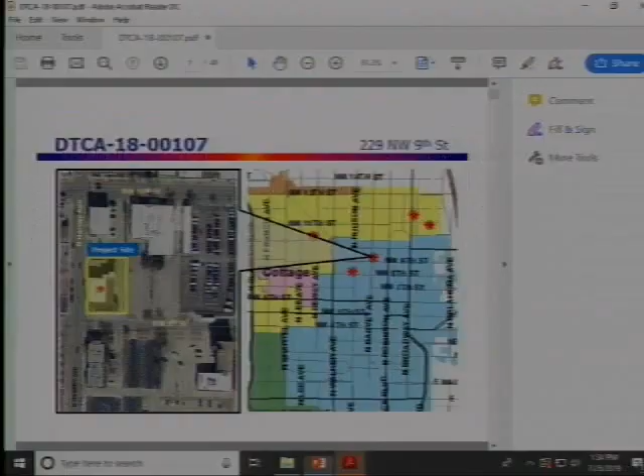Is the applicant present? Yes. And Laura, do you want to tee this up?

For those of you who are new, and we have all of those here today, and we appreciate you're here, this item came before the committee back in 2017 for work that had been done without approval. There were concerns at that time about the work that was done, and that application was ultimately denied by the committee. Unfortunately, because of how much work had been done, it just sat there, and then the work continued, and it's almost finished.

So we have a new application for consideration today. In the staff report, we did discuss the fact that given the amount of work that's been done, it would be extremely difficult to return the building to what it used to look like. You could, but it'd be very difficult.

In staff's recommendation, we looked at some modifications that can be done so that we can actually go forward with an approval and get this closed out, because it's essentially been a code enforcement case for several years now.

So there are 2 buildings. One is the tan brick and one is the red brick, and they're connected, and they were built at different times. The red brick building did not have a street presence previously, and that is what they have added.

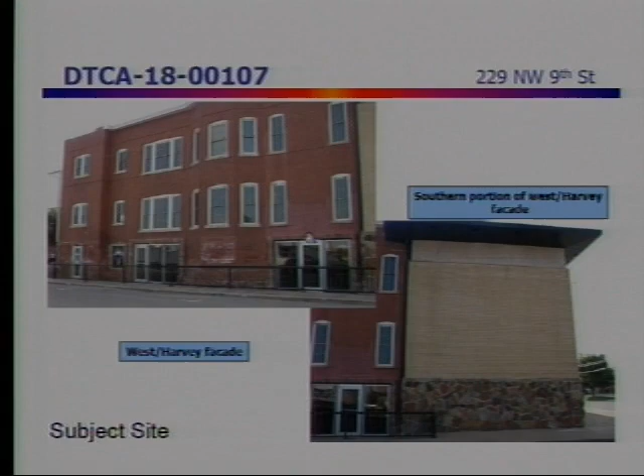Staff was suggesting to go with, we felt maybe the buff brick might be a better fit, because painting the red doesn't come across as well sometimes. A lot of times it fades. And if you go with the buff brick, that allows it to work in with the stone they added on the buff brick, so it would look as one cohesive development.

We'll point out, too, that previously they'd been approved to paint the buff brick gray back in 2014. So there's a few pieces in the loading dock area they've done, but this is the area on their parking lot side where they were trying to figure out which gray.

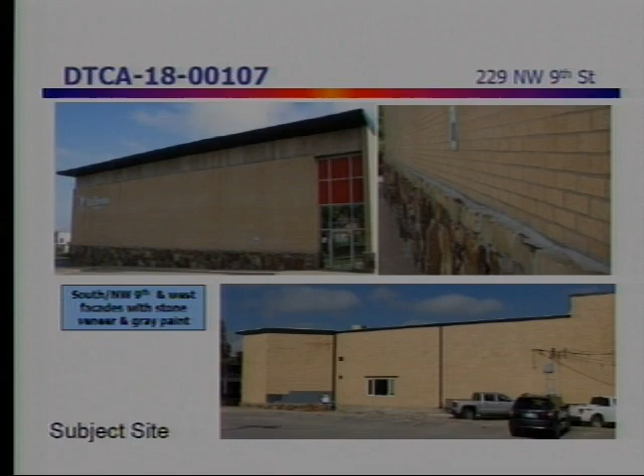We included that in the staff report to make sure that whatever color they paint, this gets painted to match - it'll either be painted buff or painted red with the rest of it. And here's an area on the back where they actually did paint the gray.

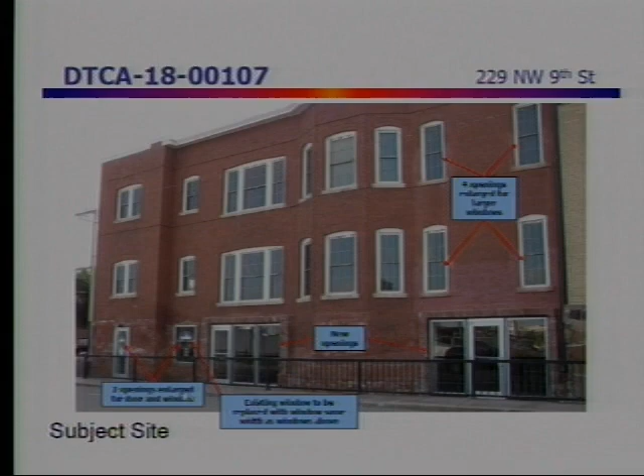The other thing we pointed out is there were some openings that were smaller; they made them bigger, which works. The only issue staff had was with one particular opening, this lower window - we'll get back to the sidewalk in a minute. There had been a small window, and there's an arch actually in the brick, but the window they put in is wider than the window that was there, so it doesn't actually work with the arch.

It's wider than the windows above it, and they have agreed to replace that, so it's the same width as the windows above it, and staff feels that is a real positive step.

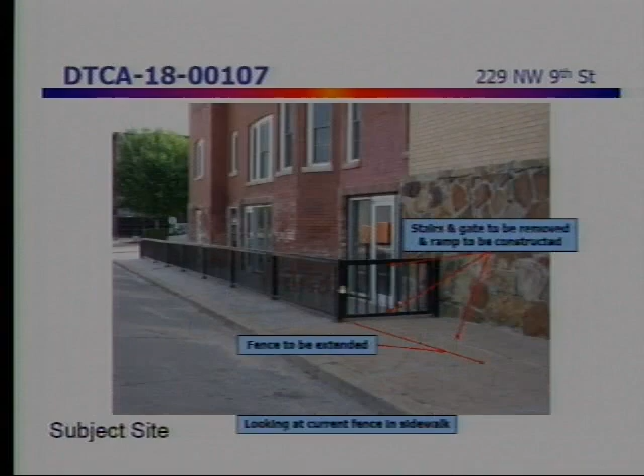The other issue before you is when they cut the building, they cut the sidewalk down to allow them to put the doors in, and we ended up with 2 levels of sidewalk that they installed. So there's currently stairs in the sidewalk, a gate, and the fence.

What they're proposing to make that better is to remove the stairs and put a ramp that runs adjacent to the building. They would extend this piece of the railing/fence to the south, and the gate could be removed at that point. Then they're proposing to put a railing on the building to help people going down that ramp when needed.

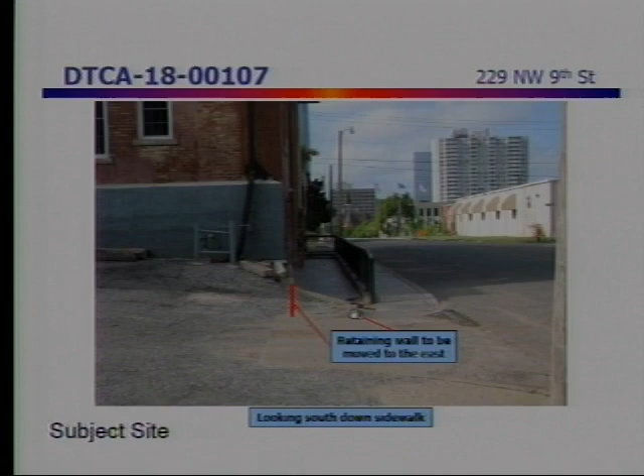The other thing they're doing is at the north end, right now there's a retaining wall, so there's a pinch point, very narrow between the retaining wall and that railing. So they're proposing to take out this piece of the retaining wall and straighten it so we end up with the width we need.

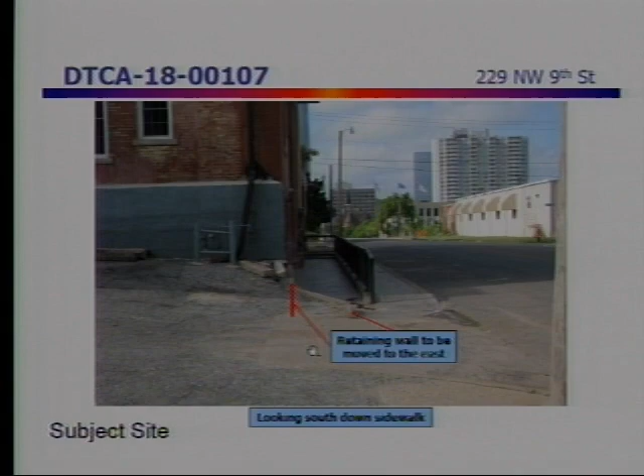We discussed the specific widths and compared it to some other cases, most of which Tony has been on, to do comparisons with restricted sidewalk areas where we have grade issues or accessibility issues getting into a building. I'll be glad to answer any questions, since it is a very long staff report.

Staff is recommending approval as proposed by the applicant. We kind of like the idea of doing everything in the buff color, but both options are before you for consideration. Can you put the rendering up?

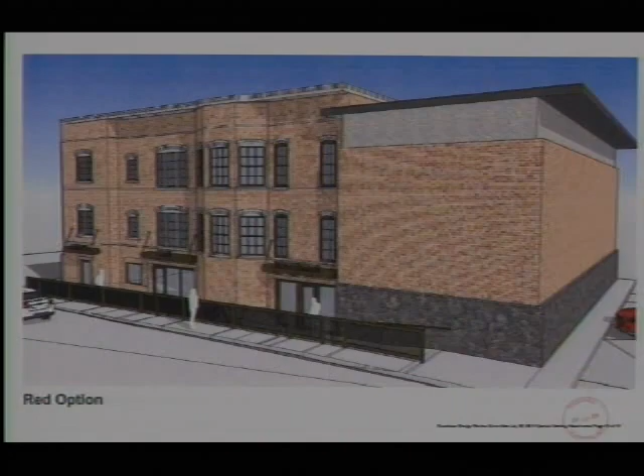So here's the rendering they submitted to go with the buff. I'd say the stone has a purplish hue in this rendering, and it's more brown, so it actually works better. Staff noted this is the one for the red option, but it's really not - the red is really red, not variegated colors, so it's not really accurate. If they make it match the red, it will be really red.

So this is the one we felt would work really well with the black canopies in this case. Yes, and I wanted to speak to this rendering real quick.

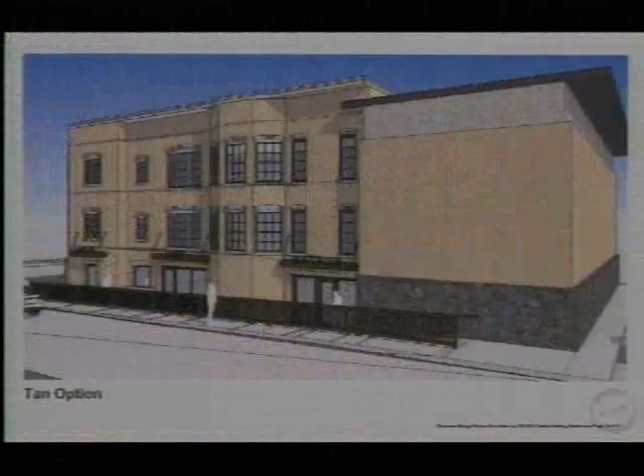Laura just enumerated all the little things that happen in terms of scope of work, but staff has been working with the applicant for many months. We're trying to figure out the most straightforward way to get to a cohesive aesthetic that still meets the guidelines and gets something attractive and activated. And I think the applicant has taken all our suggestions on how to do that.

Do we have any questions for staff?

With respect to the awnings, is that a future item? There's awnings, there's signage - those items would be coming, but before... the signage is not part of your packet at all. I thought the awnings were in here, weren't they? Yeah, the awnings are in there, but there is a part in the staff report that shows we're going to come back at a later date to review the signage.

So today, the main focus was going to be on the actual facade of the building right now. So when we come up with a better idea for the awnings and signage, we'll present that to you all in another application.

Oh, I'm sorry, guys. My name is John Pat Dickinson. I'm one of the associates with Mr. LaFuente, who's the actual applicant.

Okay, if we don't have any questions for staff, then welcome. Do you have anything further to add to what Laura presented? At this point, no. There are a couple of things we're going to be doing as soon as possible. A couple of our biggest concerns as we go through the process, if you're okay with the application today and we get approval, are the timelines for us to have everything completed. Outside of that, if there's any other suggestions or questions you have for me, I'm kind of here at your mercy today to get as much done as we can.

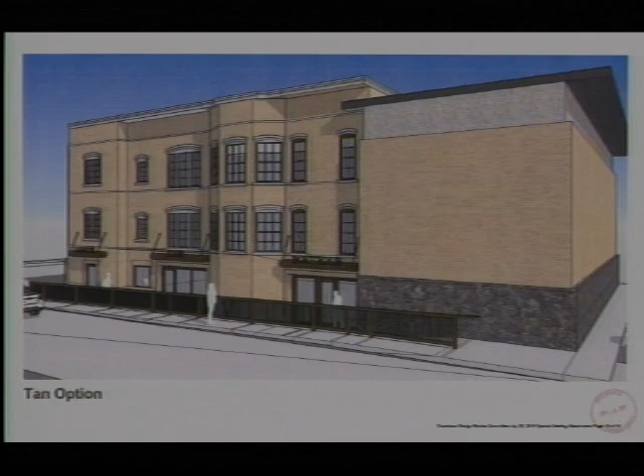And with respect to the clearance at the bottom, I can see the graphic you've created for reconfiguring the retaining wall so you don't have a pinch point, but that seems to go right into a vehicular point. Are you going to include tactile surfaces and other elements to help visually impaired individuals?

And with lines. I'm curious about the direction of pedestrian traffic. So the individual who's walking—if somebody is visually impaired, will they walk into the drive lane without understanding they've stepped off the curb? Will there be a pedestrian way, some kind of curb ramp or tactile strip, so someone understands they're getting ready to step into the automobile way? I can't tell because the site plan you've created tapers off on that portion—it doesn't delineate where it occurs with respect to the back of the parking space.

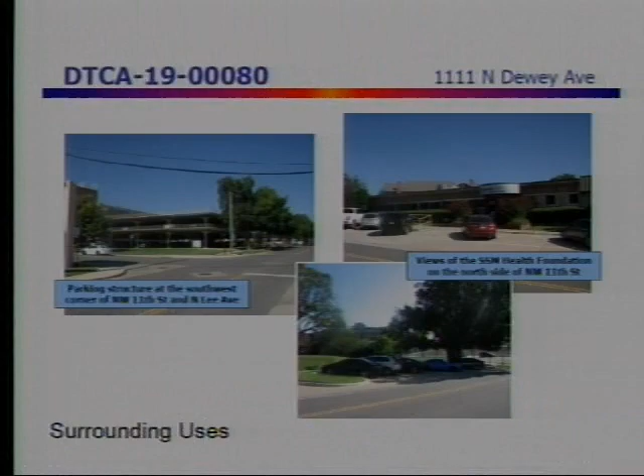For the oxygen, the emergency generator is required to be screened because it's so tall and because it faces the street. It exceeds the maximum fence height, because the maximum fence height is 8 feet, but it needs to be 12 feet in order to screen it. That's the front yard fence, so the maximum fence height is 4 feet, but it needs to be 12 feet to actually screen it.

There was a very similar installation nearby for oxygen tanks that the committee approved, a similar fence that also needed a variance for the same reason, on the other end of the building. Do we have any questions for staff?

Hi, I'm Amanda LaBrosse with Miller Architects on behalf of SSM Health. We are proposing to place the emergency generators underneath what used to be, well, what will be demolished, the canopy, since we no longer use that entrance.

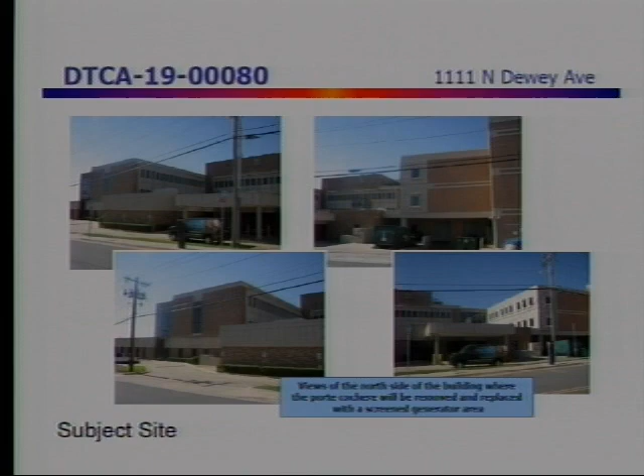We were to place the generator up on the 5th floor roof, but due to the weight of the generator we can't access it with the crane to get it to that height. Since we are no longer using that entrance, that gave us the perfect spot to put the generator, since the hospital is landlocked and they don't have any other available options.

We're proposing to use the Master Line 16 panel for its cleanliness. It is an architecturally designed panel, and it will have concealed fasteners, so it will have a more attractive appearance. We also propose to use that for the roof screen that will be on the same facade.

I'll point out that also included in this application is miscellaneous renovation work relative to demolishing the porte cochere, installing some new doors and windows, and redoing the site work immediately around the building. Do we have any questions for the applicant?

Then my understanding is we need to do this in two motions. I do have, I'm going to do one.

With respect to your screen wall, you're showing it as 12 feet tall, 8 foot between the posts, and no secondary supports. Is that wall intended to be supported by some type of delegated design system? Because 8 foot of span and 12 feet tall seems like more than that panel is going to hold, but the post just says reference structural, and we don't see the structural in here. Yes, it will be structurally designed to support itself.

Okay, and then the other thing is you provide a sight line with respect to the screen wall on the roof, but I didn't see an equivalent sight line detail done with respect to the generator. Since it's at grade, is the generator 12 feet tall or 9 foot 10? So if the generator is 9'10", do we need a 12 foot tall wall to screen it at grade? Is there a reason from a sightline standpoint that it needs to be the additional 26 inches tall? As long as the generator is in fact 9 foot 10, until we can confirm that, we were going to leave it at 12 feet to make sure there's an additional foot of clearance above that. But other than that, no, it could be shorter.